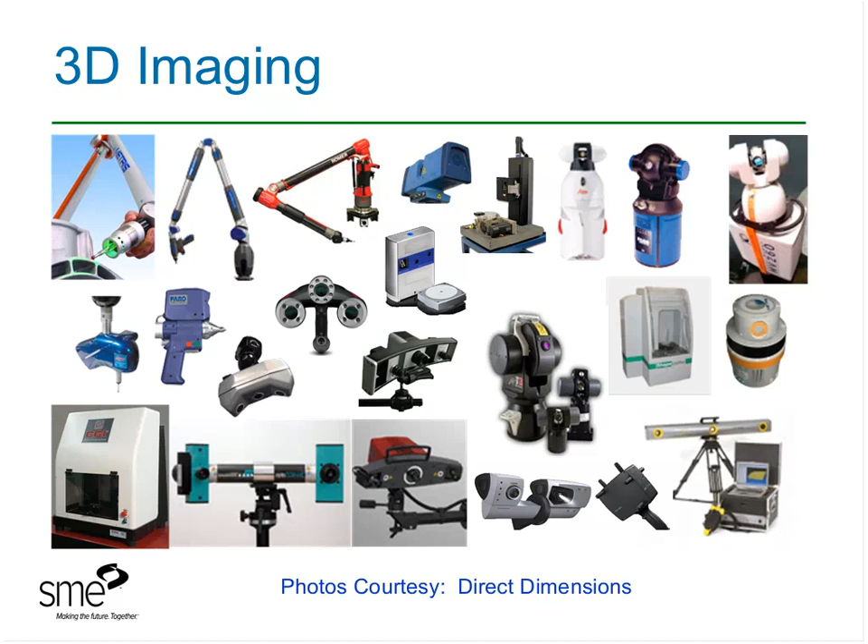But there are many different makes. This list continues to grow every year. The capabilities of these technologies are increasing year by year, and of course, as one might expect, the costs for these systems have tended to come down over time.

Some of the applications, there are a variety of these, but some of the industrial applications can range anywhere from the dental arena and the medical world, as you can see in some of the left-hand images. We also see this type of technology being used to scan large structures, buildings, or large objects, and they do this very efficiently, and again, we can reproduce those objects or structures in a 3D printing form.

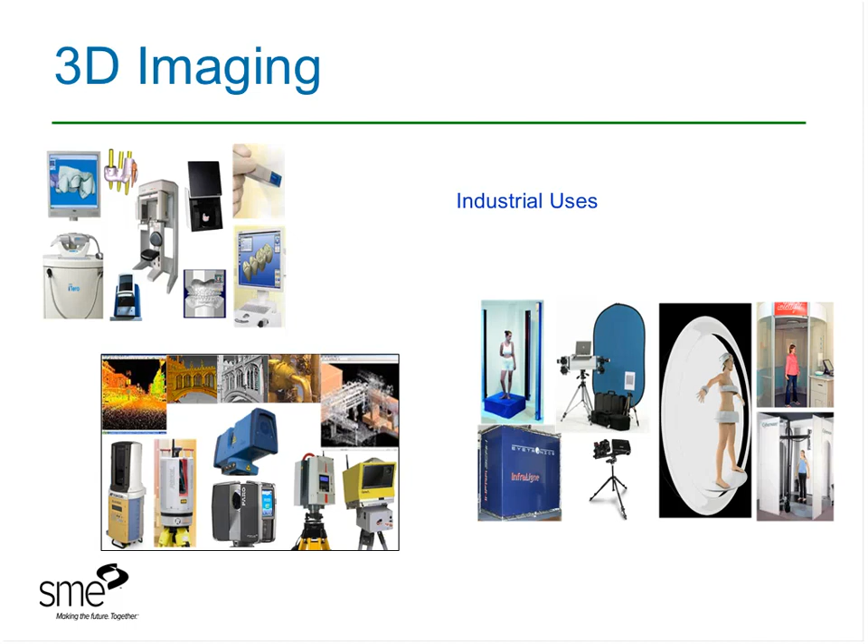And then we also see industrial uses of the technology, or more of a human use of it, which can be scanning the human body or scanning models and then using those even in film and some other type of applications. Some of the business models of how this technology is being used.

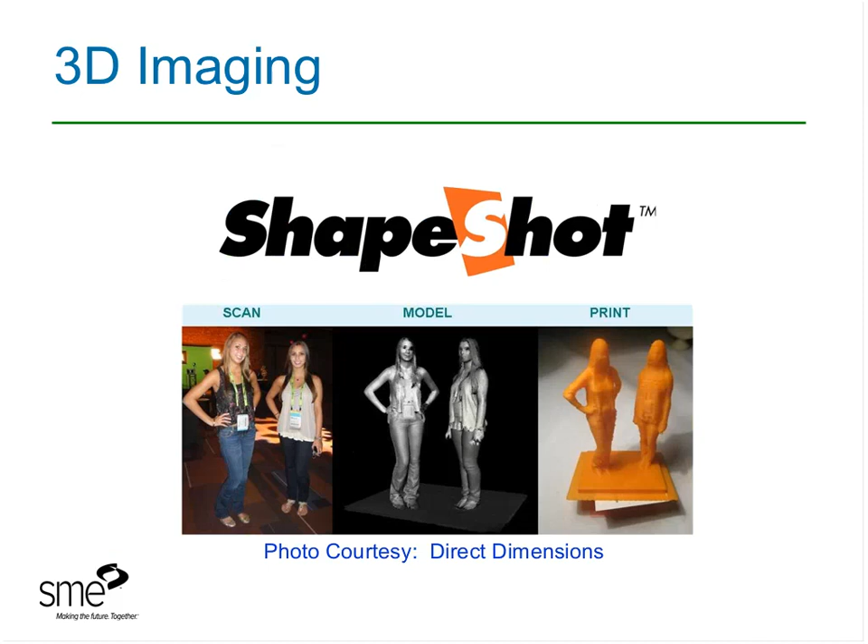This is a company started by Direct Dimensions called ShapeShot, and here you get the gist of the idea where this booth of 3D scanning was set up, and so some folks came by the booth and got themselves scanned, and then in relatively short order thereafter, that model of their scan was printed, and that becomes a takeaway or a take-home for them. So here is a potential business model where you can take the public and actually, in a fun way, not necessarily a functional way, use 3D imaging to translate it into a physical object.

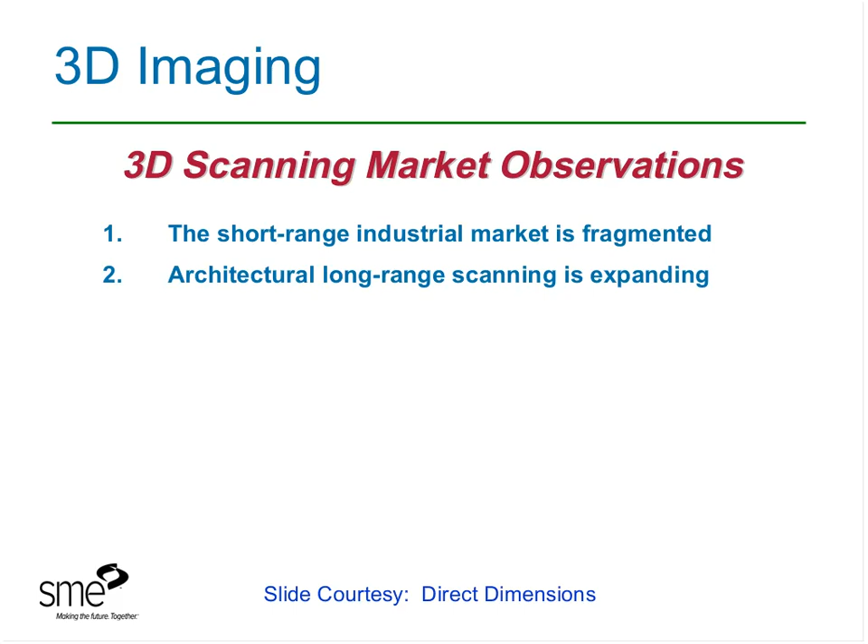Just some high-level 3D scanning market observations. What we find is that the short-range industrial market seems to be relatively fragmented. The architectural, which you saw an image of that before, is in more the long-range scanning, if you will, so distance-wise is what that is referring to, seems to be expanding. And then the medical 3D imaging arena is growing very quickly.

And again, the dental is a good example. So if we use that as an example to delve into a little bit deeper, if you go to the dentist and you ultimately need to have a coping or some other replacement, say a tooth replaced in your mouth, the old way of doing that used to be to get an impression made.

So you would put the material into your mouth, bite down, and that would give the impression that the dentist would send out to have that component modeled. A lot of dental offices are now moving toward digitally scanning your mouth or scanning that area and then pushing that digital file either to an internal milling machine or out to some of the dental shops that would then potentially 3D print that coping or potentially use the traditional methodologies. But we're quickly going into the digital age, and that also holds for medical as well.

Industrial CT scanners are clearly entering the market, and I think we'll start to see an acceleration of that. And then human body scanning is certainly an interesting topic. As you saw in that previous slide, this allows for Hollywood and for other more practical, or industrial applications to be utilized. So if you think about 3D imaging or scanning the body, you can imagine how there might be many biomedical applications that could push forward.

And then the consumer demand is really sort of an unknown still. So how successful can that business model be where you have that home 3D scanner, which are relatively inexpensive. I believe Xbox had something that came out a few years ago. So will the home user, will the consumer begin to use 3D scanning? One can again imagine how you can take an object at home, scan it, and then print it on your home 3D printer. So again, the convergence between these two technologies will be fairly interesting as we march forward.

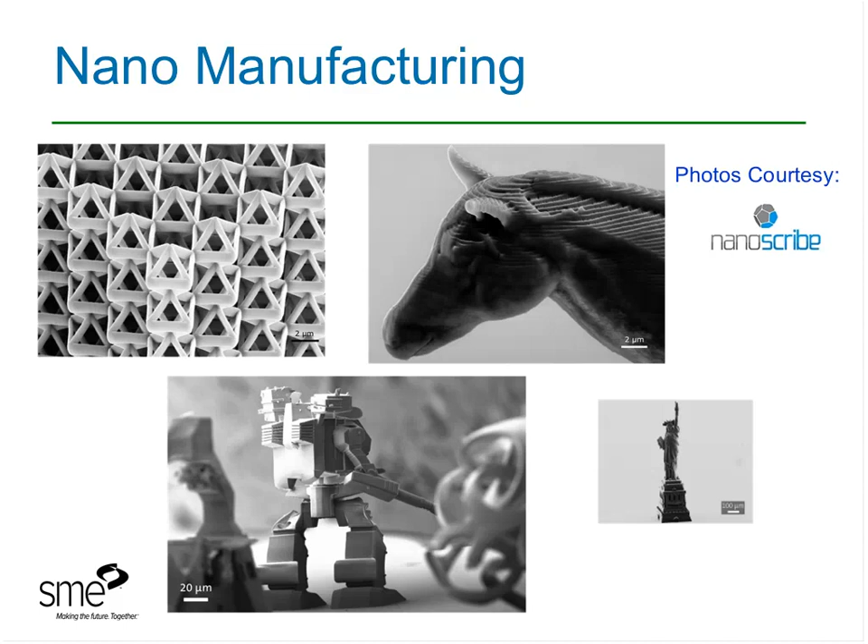So this has a number of interesting applications. It's still relatively new and early in development, but many applications. Medical certainly has interest in miniaturized components and small components that can accurately and consistently be printed. To date, these are generally printed in polymer-type materials.

RTAM and SME are heavily invested in education, and one of the programs RTAM is involved in is the Bright Minds program. For folks who have been to the Rapid shows, one of the days typically features high school students escorted around the show floor to see new technologies and manufacturing technologies. It's a very successful program and one of the mission statements of SME is education. We want our young generation of students to be interested in science, technology, engineering, and mathematics, so SME and RTAM spend a fair amount of time working with these students, getting them interested in the future of manufacturing for our country.

We also have a tremendous amount of great work going on with the ASTM F42 Committee on Additive Manufacturing Technologies. This committee has been in operation for around 4 years, and there are many dedicated individuals in our industry who sit on it on a volunteer basis, developing and working on various standards around additive manufacturing. Additive manufacturing is getting a tremendous amount of attention, and with any new technology there needs to be a mechanism to develop standards for quality and communication reasons, which is what this committee is working on. There's quite a bit of opportunity here, and for those interested, I highly recommend getting involved in this standard-setting community.

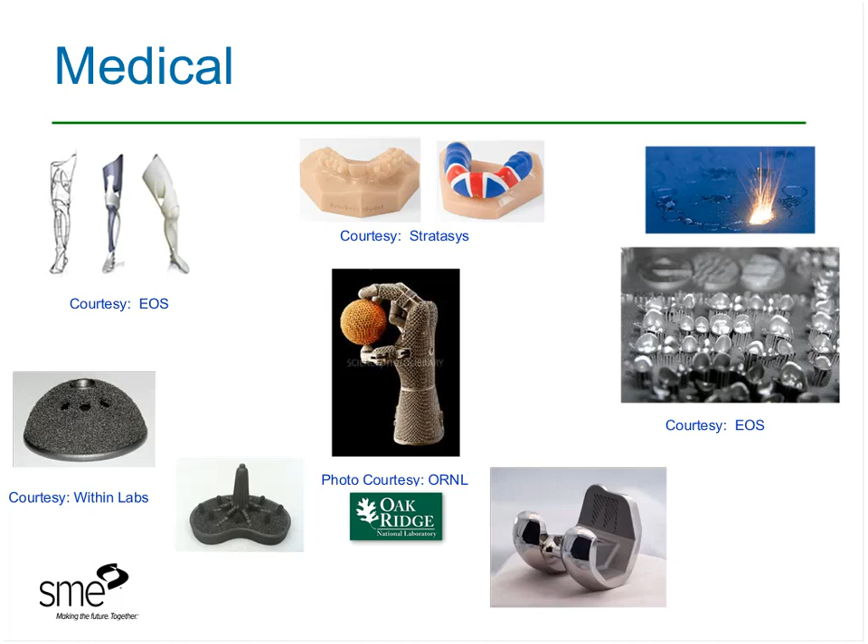Other examples can range anywhere from mouth guards, as you can see from the photos with the little mouth guard that appears to be the British flag on it, to prosthetic devices, bionic type devices. There's a number of applications in the medical field for additive manufacturing, and the examples are increasing every day.

As to how various companies and individuals think about leveraging the technology. If we talk a little bit about the direct digital manufacturing group, I'll focus in on polymers. Direct digital manufacturing is another way of saying additive manufacturing or 3D printing. There are a number of different terminologies used, but they all basically refer to the same area.

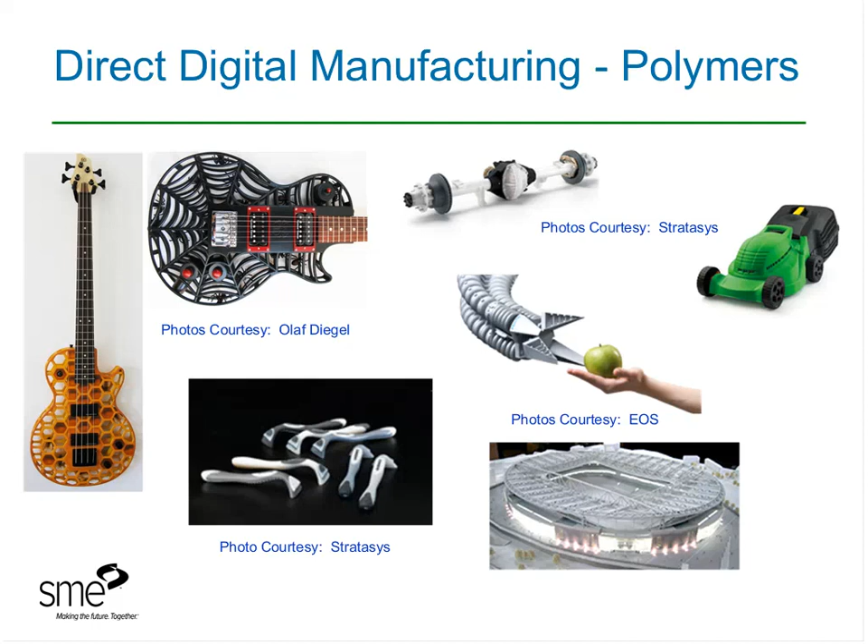That company was actually acquired by Stratasys, so that's now part of the Stratasys line of technology. If we look at metals and additive, we'll find that there are a number of developing applications.

So the opportunities abound in the aviation world to leverage this kind of lattice structure. Of course, there are many other industries, whether the sporting industry or consumer goods industry, where lightweighting is going to be a very important topic as well, and medical as well.

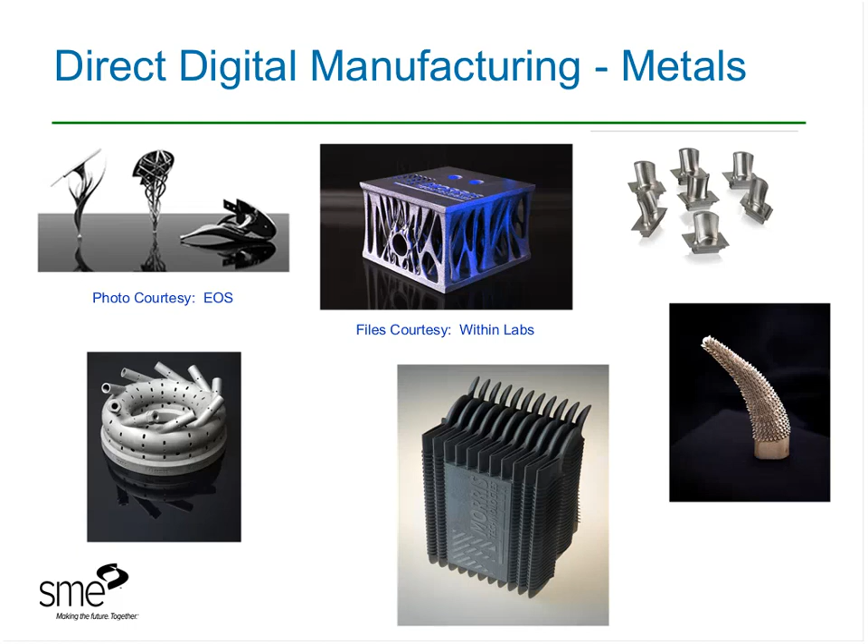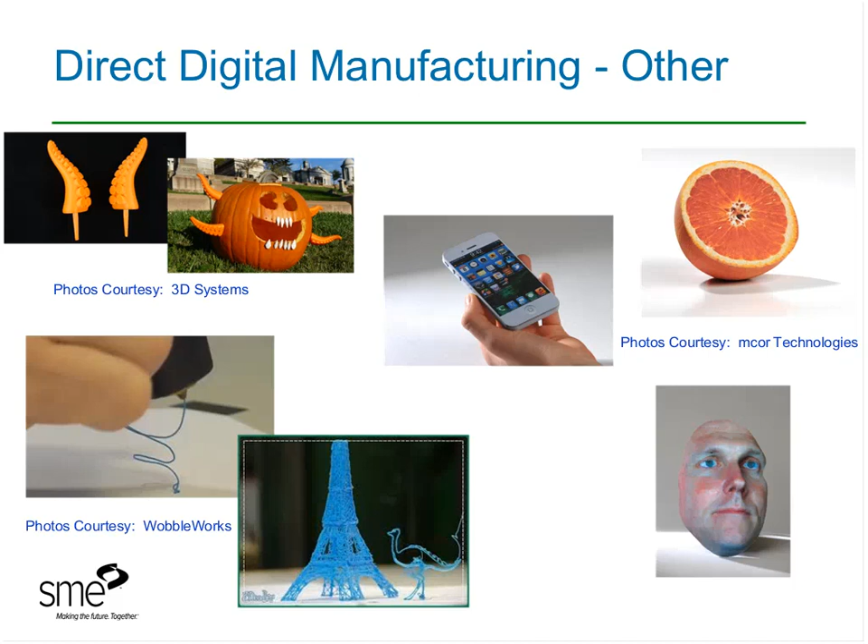I don't know the status of that today, but it is another application of 3D printing in a whole different way, where the user is actually moving the 3D printing mechanism around and the material around themselves.

So if we look at some just high-level trends over the past year, clearly the attention in the industry is phenomenal. There is an incredible amount of press that is being given to 3D printing, to 3D scanning. I think we hear from almost every major news organization and magazine an article on 3D printing at some point in the last year.

I think we're also starting to begin to get industry acceptance of these technologies as not just being fanciful or prototyping technologies, but we're starting to see the various industries begin to look at these technologies as a means to production of components, and even end-use items, even consumer end-use items.

And that goes for both the polymers and the metals. So, honestly, I don't know if there's an industry that really hasn't been touched by these technologies at this point, or isn't looking at the technologies to see how it impacts their business. I think you can look at anything from medical and aerospace, energy, luxury goods, and on down the line, and it seems that the technology, whether it be in polymers or metals, is having a play in most of these industries.

Look a little bit at the materials. Materials drive a lot of the applications, as might be expected with any of these prototyping technologies.

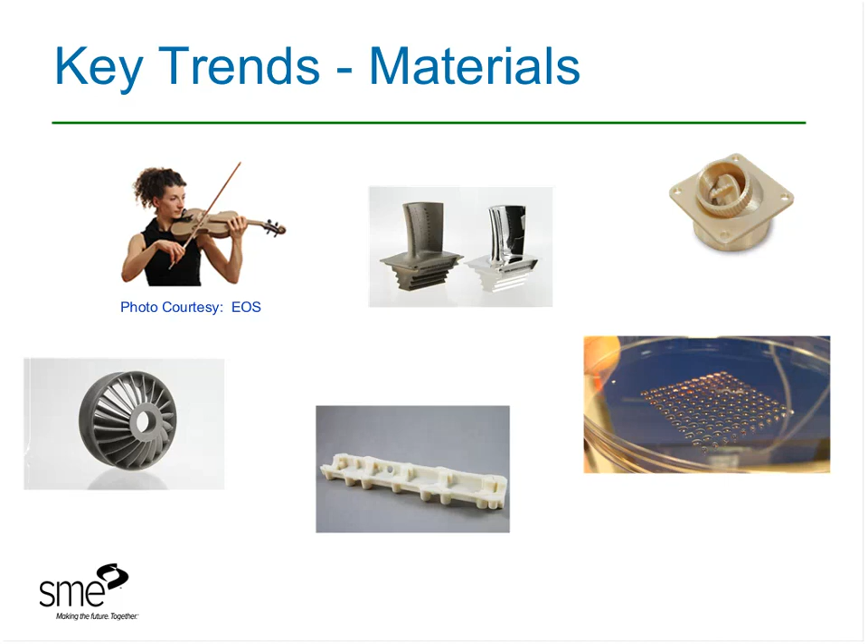Relative to some industry changes, I'll talk first about one that's relatively near and dear to myself, which is the acquisition of our companies, Morris Technologies and RQM, by GE Aviation that happened in November of last year. So obviously I can talk to that one. There are many other industry consolidations and acquisitions that have been happening. 3D Systems acquired majority share of Phenix. Stratasys has been acquiring a few companies, MakerBot, etc.

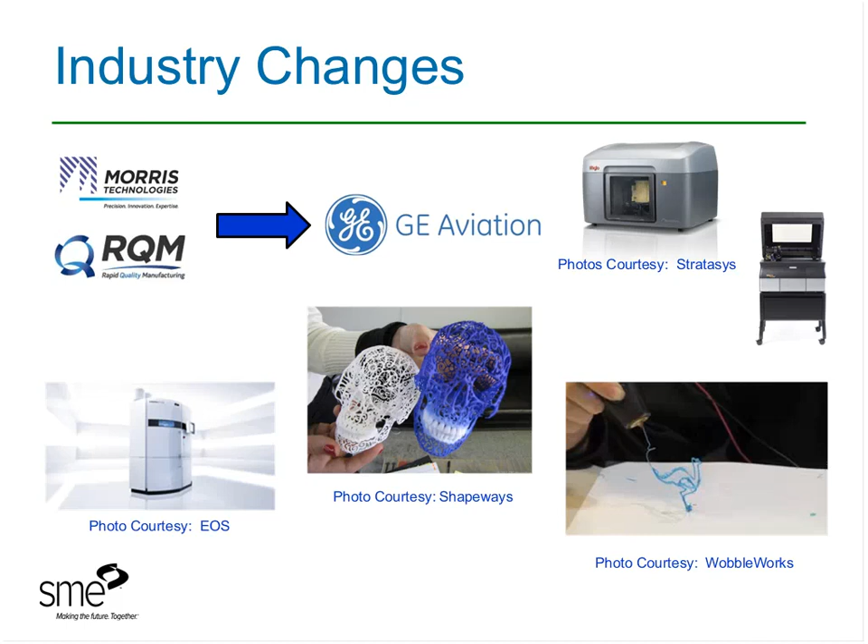And I think that trend will continue. We're going to continue to see new businesses pop up and new ways of leveraging and using additive, aka WobbleWorks. And then the online content like Shapeways - we'll continue to see many of those type of companies develop and move forward. I also would suggest that we'll see a variety of different machines and machine manufacturers evolve their technologies. As would be expected with any high technology industry, the machines and processes continue to get better, more affordable, more accurate, and that is a trend we will see happening over the next 5, 10, maybe perhaps even 20 years as the technologies evolve and move forward. I think we will see better materials and many more applications.

As we look into the future, I would expect to see a tremendous amount of additional industry consolidation. That can range from the service providers, to the OEMs creating the equipment, the software creators, and the material producers. We will start to see a tremendous amount of consolidation, and I also think we'll see new businesses or new players enter these markets. As I just mentioned, we're going to see the technology capabilities expand rapidly. I think we'll see many new business models. There are a lot of people thinking about how they can leverage and use 3D printing and 3D scanning.

In a variety of markets, you can see where there are going to be market niches. So you might suggest that somebody becomes an expert in one particular industry. They build their business around that industry, not only with the additive portion of their business, but with some of the other technologies that help to vertically integrate them. I still think we're going to see a fair amount of application discovery, and for sure we will see market displacements. That has already happened in the aerospace industry, where companies who may not have been aware or as knowledgeable about the technology have found a larger company, invested earlier in the technology, displace some of their market.

They do that by virtue of creating and designing components that start to bleed into what their markets were, and then the IP ultimately gets owned by that larger OEM. So I think this is both tremendous opportunity and potential threat to many companies, and it's probably important for most companies and businesses to have an understanding of the status of 3D printing and 3D scanning and what that means to their business.